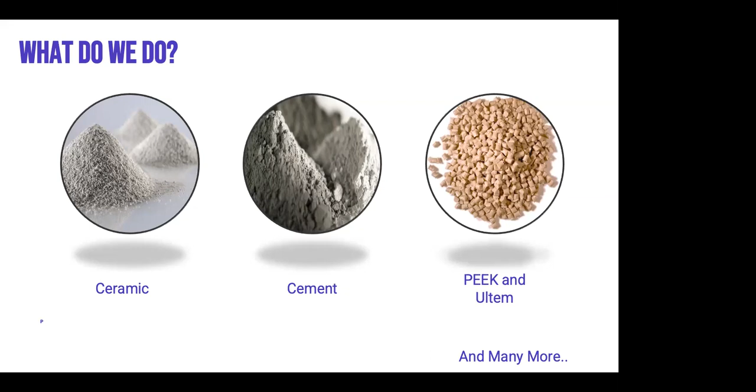In addition to the R&D activities and building of customized 3D printers or 3D printers for specialized applications, we offer 3D printing as a service, 3D modeling and product design, and also we participate with academia for R&D in the field of additive manufacturing.

We have a wide range of 3D printing technologies for our customers to choose from. The range of technology we have helps our customers balance their budget, timelines, and their technical requirements. More on these technologies would be explained in due course of time.

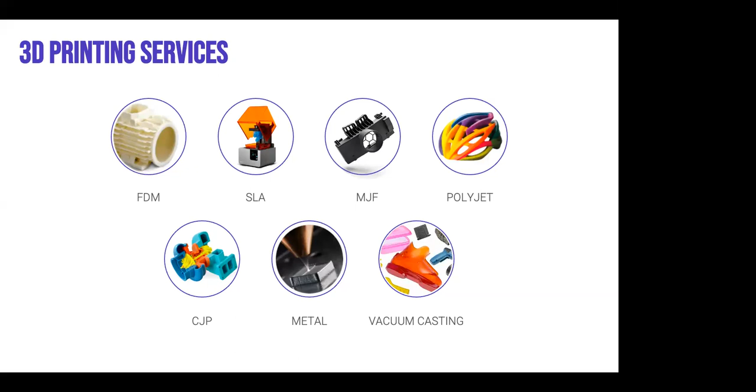It can be noticed that majority of these 3D printing firms in India focus on the service model, but the uncomfortable truth is that only a handful number of startups are focusing towards technology development in India. Though 3D printing has its applications in a myriad of sectors, the manufacturing and medical sectors have been huge beneficiaries of this technology. Though I would like to talk about each of the applications of 3D printing technology in each sector, I'm informed that there are dedicated speakers to talk on those lines.

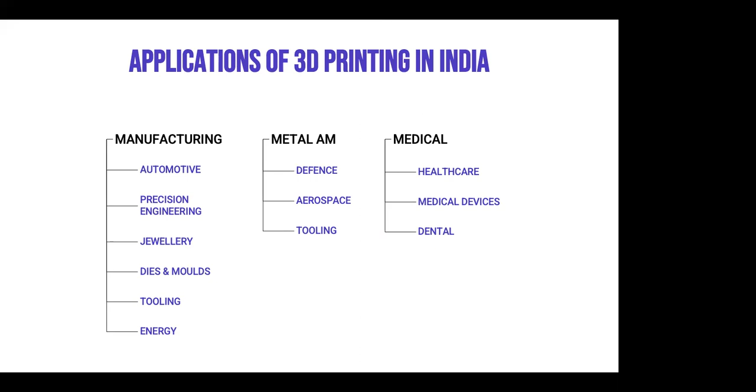A basic split up of additive manufacturing application in India is shown here. It can be noticed that the automotive industry, the transport industry, the tooling and the engineering industry, jewelry and healthcare industries have been one of the early adapters of this technology here in India.

3D printers can be categorized into one of several types of processes. Vat polymerization, wherein a liquid polymer is cured by light. Material extrusion, molten thermoplastic is deposited through a heated nozzle. Powder bed fusion, powder particles are fused by a high energy source. Material jetting, a process in which liquid photosensitive fusing agents are deposited on a powder bed and cured by light. Binder jetting, a process in which droplets of liquid binding agent are deposited on a bed of granulated materials which are later sintered. Direct energy deposition, in which molten metal is simultaneously deposited and fused. Sheet lamination, wherein individual sheets of material are cut into shapes and laminated together. These are the 7 main different types of 3D printing technologies.

Within each of these technologies, it can be noted that there are unique technologies, and for every unique technology there are different brands selling very similar printers. Let's go into these step by step.

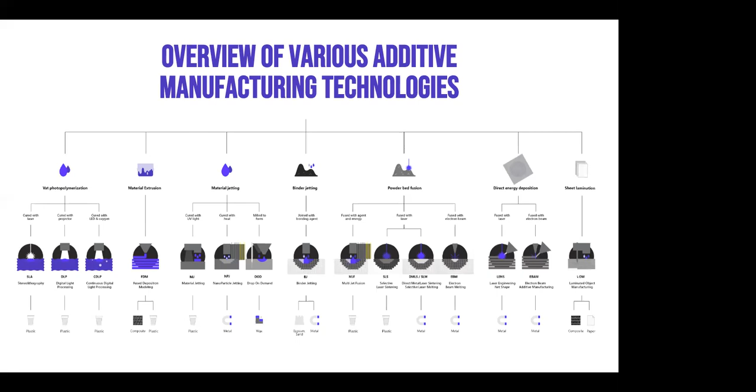Vat polymerization is a category of additive manufacturing process that is used to create 3D objects by selectively curing liquid resin through targeted light activated polymerization. Stereolithography was the first additive manufacturing process to be patented and commercialized. Since the advent of stereolithography in the 1980s, vat polymerization has grown to also include technologies such as continuous liquid interface production and direct light processing under its gambit.

All types of vat polymerization use special resins called photopolymers as the printing material. When exposed to a certain wavelength of light, the liquid photopolymer molecules rapidly bind together and cure into a solid state through a process called photopolymerization.

As shown in the image, in most 3D printers that operate under the principle of vat polymerization, a liquid photopolymer is held in a container or vat with the build platform partially submerged near the surface of the liquid. Using the information supplied by the CAD file, the printer directs a light source to selectively cure the liquid photopolymer into a solid layer. Then the build platform is resubmerged into the remaining resin, and the process is repeated for the next layers until the design is fully printed.

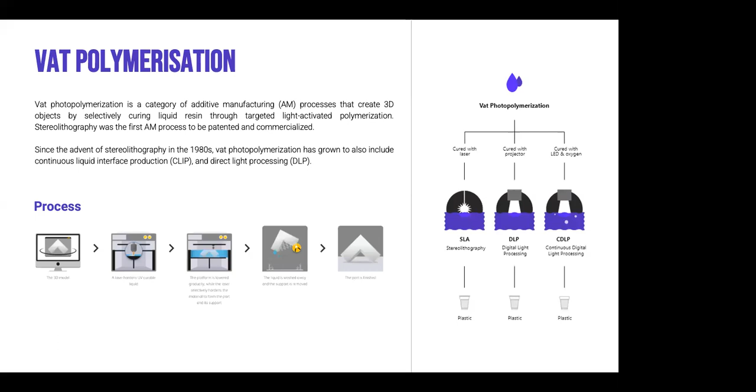Stereolithography and digital light processing in 3D printing are the two most commonly used resin processes. In stereolithography, an object is created by selectively curing a polymer resin layer by layer using an ultraviolet laser beam. DLP is a similar process to SLA, but it uses a digital light projector screen to flash a single image of each layer all at once.

Because the projector is a digital screen, the image of each layer is composed of square pixels, resulting in a layer formed of small rectangular bricks called voxels. DLP can achieve faster prints for some parts as the entire layer is exposed at once, rather than drawing it out with a laser as in the case of the SLA process.

It is also interesting to note on the right side of my screen that there are two types of SLA machine setups, the top-down orientation and the bottom-up orientation. The top-down SLA printers place the laser source above the tank and the part is built facing upwards. The build platform begins at the very top of the resin vat and moves downwards after every layer.

In the bottom-up approach, the SLA printers place the light source under the resin tank and the part is built facing upside down. The resin tank has a transparent bottom and a silicone coating that allows the light of the laser to pass through but stops the cured resin from sticking onto it. After every layer, the cured resin is detached from the bottom of the tank as the build platform moves upwards.

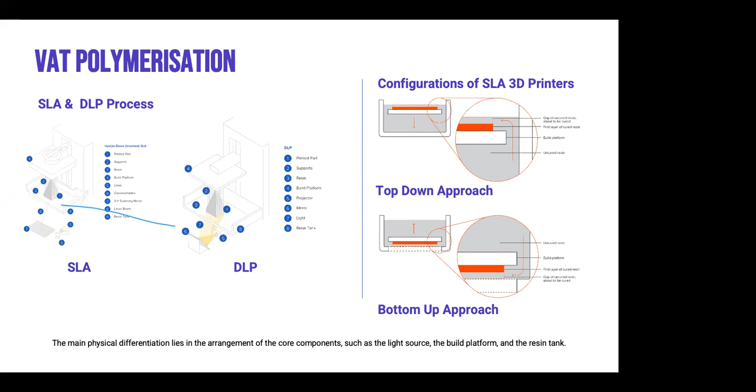Coming to the characteristics of vat polymerization printed parts, in SLA printed parts, there is no difference between the z-axis and the xy plane in terms of chemical bonds. Each continuous part printed on an SLA machine is a continuous polymer network. Since the SLA lines are fully bonded to their neighbors, there are no voids or microscopic cracks. As a result, isotropy and water tightness are achieved.

SLA parts and DLP parts can produce parts with very high dimensional accuracies and very intricate details. SLA parts have a very smooth surface finish, making them ideal for visual prototypes. In SLA, we have a wide range of materials available: rigid materials similar to injection molding ABS, tough and durable materials like polypropylene, clear transparent materials like polycarbonate parts, castable resins, high temperature resins, and specialty resins specifically used for the dental and jewelry sectors.

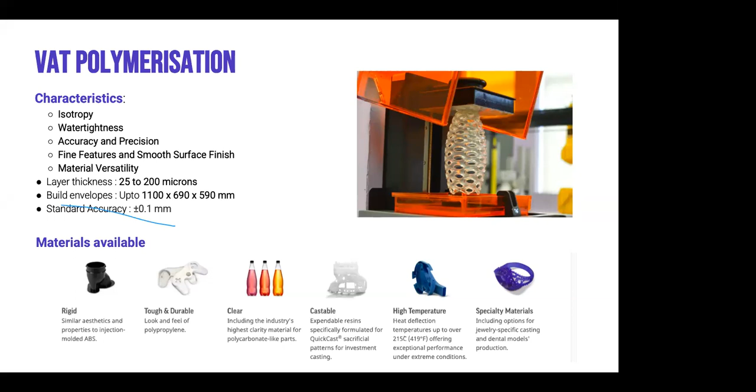So, to sum up, SLA printed parts or DLP printed parts are basically used as design verification models for appearance and proof of concept models. These are functional prototypes and models for form and fit testing. These can also be used for wind tunnel testing models. The high clarity, because of the resins that possess transparency, can also be made into parts for visualization with transparent assemblies and complex assemblies.

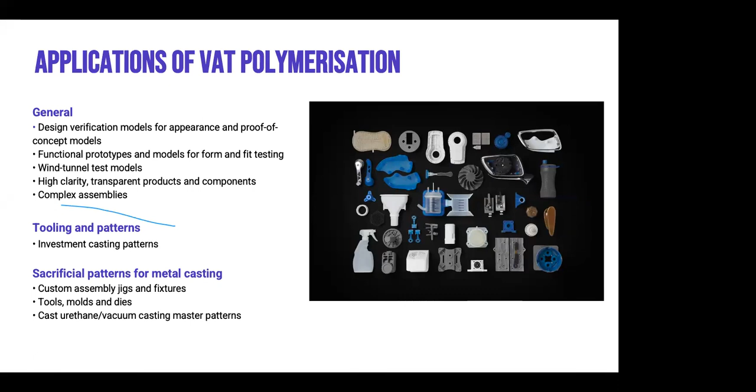One significant application of these SLA printed parts is in the use of vacuum casting, wherein the master is made using 3D printing. Vacuum casting is a technology recommended for production of 10 to 100 parts for mechanical and visual tests. It is a process in which resin is poured into a silicone mold.

The working principle in vacuum casting is similar to injection molding. Both ways produce parts by the mold. However, vacuum casting differs significantly from injection molding in the specific process. The vacuum casting process can be outlined as follows.

Firstly, upon confirmation of the CAD file, the technician starts to make a 3D master model through 3D printing. The master model will be placed into a casting frame and filled with liquid silicon. The silicon mold will be cut into two parts after it is well cured. As per the design request, the technician will measure the proper proportions of the polyurethanes, and then the polyurethanes will be poured into the silicon mold and cured in the vacuum casting machine.

The vacuum casting machine, due to the vacuum condition, is able to remove any trapped bubbles that ensure smooth finishing.

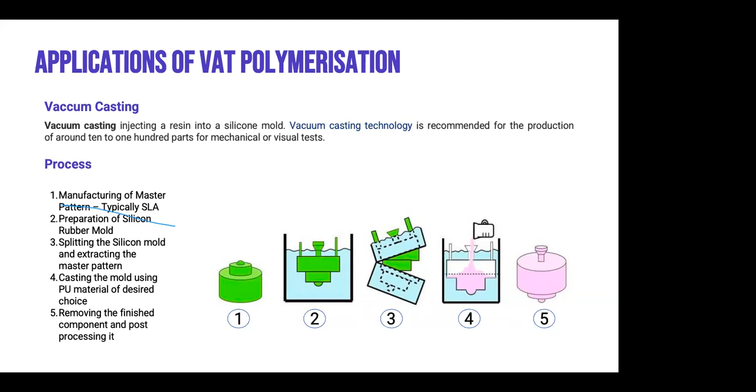Some of the advantages of vacuum casting are high precision and high fine details. Due to the silicon mold, it makes it very much possible to obtain parts that are faithfully true to the original model. Even with complex geometries, the result is perfect and the quality is comparable to the final part. Additionally, the use of PU resin allows you to choose from a wide range of materials as close to your requirement, with a variety of choices in terms of flexibility and rigidity.

It can also give you an option in which the parts can be pigmented with color, or you can achieve a transparency or translucency finish as per your requirement. It is also possible to create overmoldings and produce parts with painted finishes.

One more significant advantage of using vacuum casting is the pricing and the deadlines. The use of silicon mold allows a reduction of cost compared to an aluminum or steel mold. In addition, you can achieve economies of scale from around 10 parts, which makes this method more valuable than 3D printing. Finally, it takes 7 to 10 days to get 30 to 50 functional prototypes, making it a most attractive method to meet urgent requirements.

However, there are certain limitations for vacuum casting. The lifetime of the mold is very short.

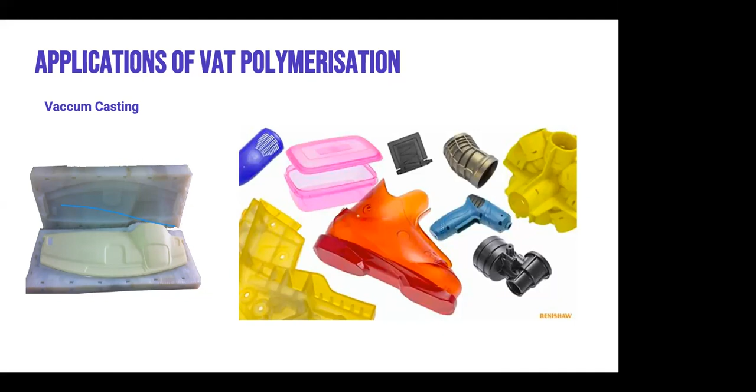Another sector where vat polymerization has been deeply impactful is the jewelry sector. 3D printed jewelry production augments the principles of investment casting, or lost wax casting, with the advantages of digital design and manufacturing process. With lost wax casting, jewelry designers had to hand carve the original pattern in wax, place the wax pattern in a mold to be burnt out, and then pour the precious metal like gold or silver into a mold cavity to create a cast piece.

To achieve its final appearance, designers had to polish and finish the cast piece to shine. With a digital workflow, jewelers use 3D printing software and tools to create designs digitally, and using high resolution 3D printers, produce the 3D printed patterns that can be cast in a mold. After a burnout of a positive pattern, the process follows the same as investment casting pattern, and the process is shown on the screen.

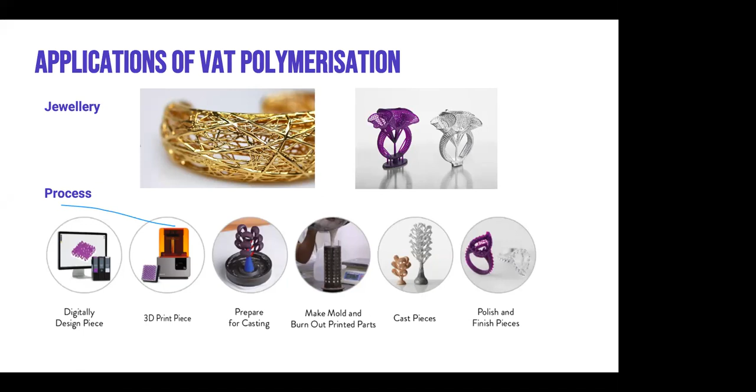Going forward to the material extrusion process, extrusion-based technology is the most popular one in the market. While there are other types of technologies for creating extrusions, heat is normally used to melt bulk of the material in a small portable chamber, and the material is pushed through the feed system, which is used to create pressure to extrude.

Here is how an FDM printer works. A spool of thermoplastic filament is first loaded onto the printer. Once the nozzle has reached its desired temperature, the filament is fed onto the extrusion head and into the nozzle where it melts. The extrusion head is attached to a 3-axis system that allows it to move in the X, Y, and Z directions.

The melted material is extruded in thin strands and deposited layer by layer in predetermined locations where it cools and solidifies. Sometimes the cooling can be accelerated through cooling fans. To fill in an area, multiple passes are required. When the layer is finished, the build platform moves upward or downward, or the extrusion head moves upward depending on the configuration of the printer, and a new layer is deposited. This process is repeated until the part is complete.

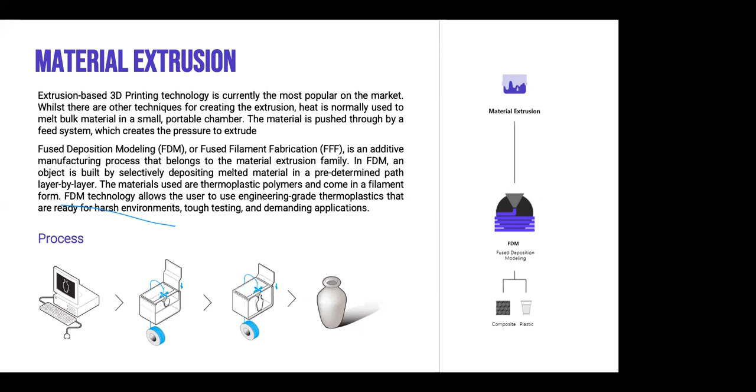So why do we have to prefer the FDM process? FDM is an inexpensive process and works well with a wide variety of plastics. One of the greatest advantages of this FDM material process is the durability of the materials and the stability of the material properties over a period of time. The production grade thermoplastics used in FDM are suitable for detailed functional prototypes, durable manufacturing tools, and also low volume manufacturing parts.

However, parts fabricated using the FDM process are anisotropic, the layer lines are visible, and they're comparatively low in terms of dimensional accuracy and resolution. The minimum layer thickness in this case starts from 0.2 mm. There are FDM 3D printers available with a print volume of 300 by 300 mm up to as large as 1 meter by 1 meter by 1 meter in the XYZ axis. So standard accuracy is 0.2 mm.

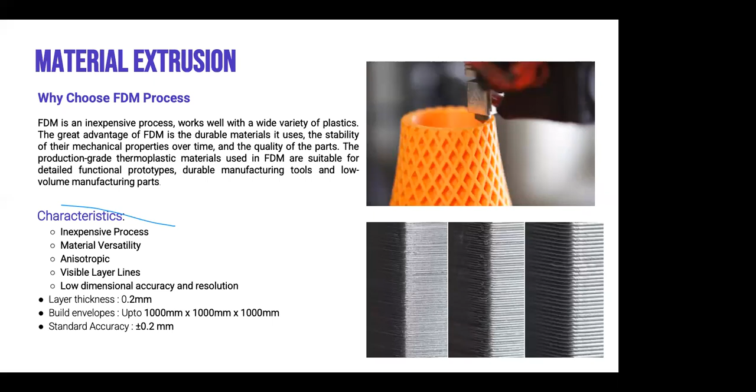There are quite a number of materials that can be used with FDM processes. I would categorize them basically as basic thermoplastics such as PLA, ABS, and PETG. These plastics do not have excellent qualities, but are the most popular printing thermoplastics available. PLA is the most common printing plastic that prints well and possesses decent mechanical properties. However, its complete lack of heat resistance and low durability makes it impossible to use in industrial environments. ABS has superior heat resistance, but isn't particularly strong and reacts poorly with manufacturing chemicals.

PETG is a 3D printing material, a substrate of polyethylene, and is a cross between the two. It is a bit stronger than ABS and a bit more heat resistant than PLA, but is still not robust enough to withstand most manufacturing equipment. The niche materials include TPU, polycarbonate, and nylon. Niche thermoplastics have one or two excellent facets, making them very useful in specific applications.

Nylon is a perfect material. It's not stiff or particularly strong, and it carries virtually no heat resistance, but it's extremely durable and has remarkable chemical resistance. As a result, it's used in applications where flexibility and durability are very important. TPU is an extremely ductile material that has properties similar to nylon, but with a bit more flexibility. Polycarbonate is an excellent plastic in many aspects, quite strong and heat resistant, but only moderately durable and chemically resistant.

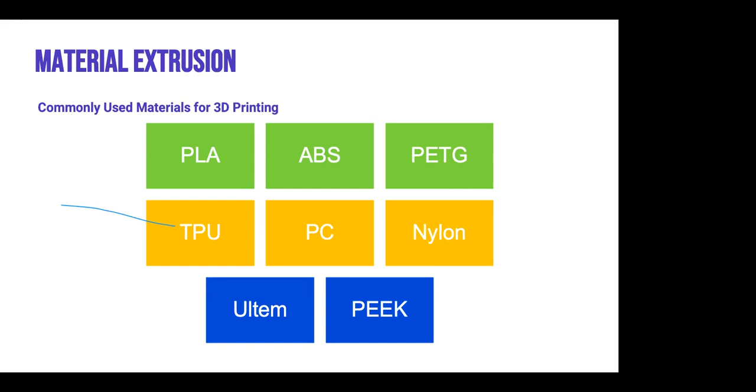Composite 3D printing is a young technology, but one with huge, largely untapped potential.

So what makes a composite? A composite is a combination of two or more materials with dissimilar properties, provided these properties work together to make a single advanced material. When we speak about continuous fiber 3D printing, a composite means that a particular fiber is impregnated and covered with plastics. Typically these are a base polymer referred to as matrix, and reinforcing fibers of any type, bound together to produce particular sets of desirable characteristics. In the context of 3D printing, fiber composites can be of two forms: chopped carbon fiber composites, and continuous carbon fibers.

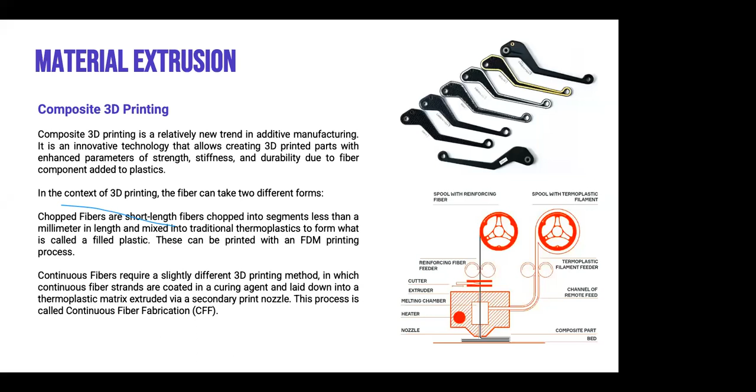Going forward, powder bed fusion processes. Powder bed 3D printing technology spawns products with precision and accuracy. This technology enables the manufacturing of a vast array of geometrically complex products using a heat source, mainly lasers or electron beams, to fuse powder particles layer by layer, forming a solid part. Manufacturers can benefit from this technology due to the freedom of design consideration it provides, enabling the designer to use creativity in achieving desired components.

The powder bed fusion methods can be classified into selective laser sintering (SLS), multi-jet fusion by HP, selective laser melting (SLM), and electron beam melting.

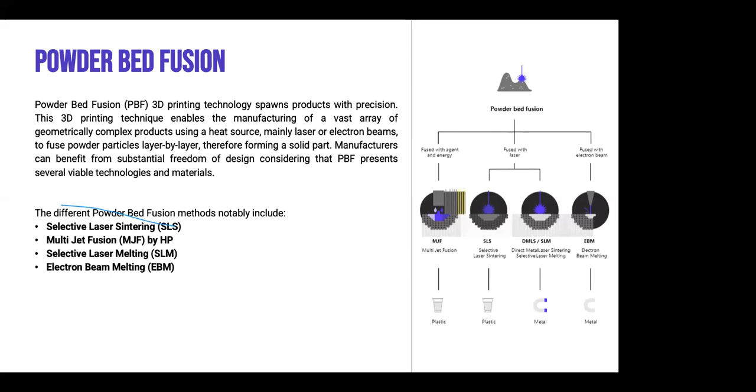Let me first talk about the SLS process. SLS produces solid parts by using a laser to sinter thin layers of powdered raw material, one layer at a time. The process begins by spreading an initial layer of powder over the build platform. The cross section of the part is scanned and sintered by the laser, solidifying it. The build platform then drops down one layer and a new layer of powder is applied. The process repeats until a solid part is formed. The result is a component completely encased in unsintered powder. The part is removed from the powder, cleaned, and then ready for further post-processing.

Multi-jet fusion is a powder-based technology that does not use lasers. The powder is heated uniformly at the outset. A fusing agent is jetted where the particles need to be selectively molten, and a detailing agent is jetted around the contours to improve part resolution. While heat lamps pass over the surface of the powder, the jetted material captures the heat and helps distribute it evenly, forming a solidified layer.

Multi-jet fusion uses fine-grained materials that allow ultra-thin layers of 80 microns thickness, leading to parts with high density and low porosity compared to parts produced with laser sintering. It also leads to exceptional smooth surface finish straight out of the 3D printer, and functional parts need very minimal post-processing from this technology.

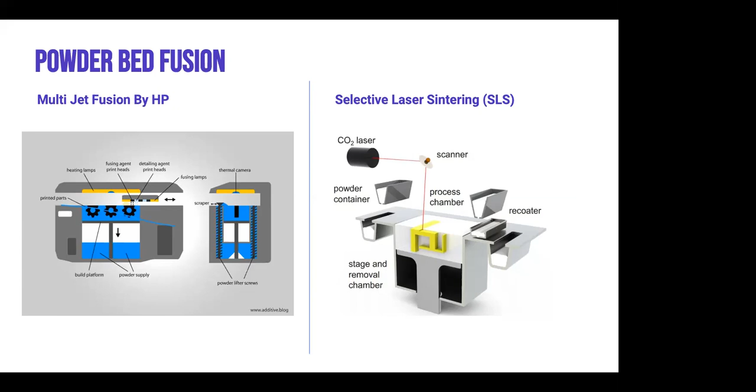However, there are certain common traits which both these printers possess. Freeform design: since these are powder-based processes, the previous layer of unsintered powder acts as support for the next layer. Both these printers can offer functioning with a versatile amount of material. These are scalable, fast, and cheap.

Both SLS and multi-jet fusion find application in a wide array of sectors such as aerospace, automotive, product design, consumer electronics, defense, and research and development.

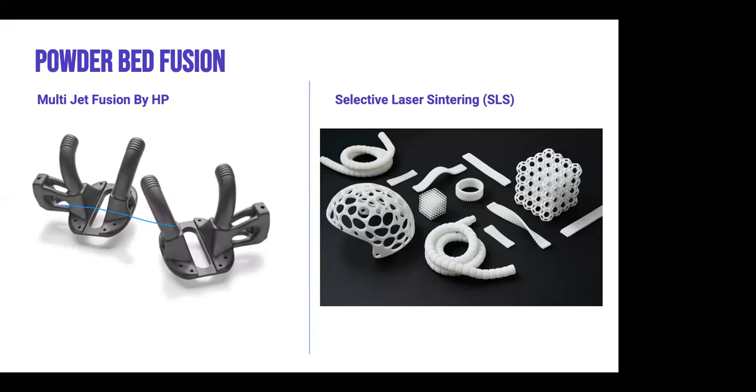SLM and DMLS, both selective laser melting and direct metal laser sintering, produce parts via methods similar to SLS. The main difference is that SLM and DMLS are used in the production of metal parts. SLM achieves a full melt of the powder, while DMLS heats the powder to a near melting temperature until they are chemically fused together. DMLS works with alloys, while SLM can use single component metals such as titanium.

Unlike the SLS process, SLM and DMLS require support structures to compensate for the high residual thermal stresses generated during the printing process. Electron beam melting.

Electron beam melting uses a high energy beam rather than a laser to induce fusion between the layers of a metal powder. A focused electron beam scans a thin layer of powder, causing localized melting and solidification over a specific cross-sectional area.

Electron beam systems produce less residual stresses in parts, resulting in less distortion, and they require less anchors and support structures. Moreover, electron beam melting uses less energy and can produce layers at a faster rate than SLM and DMLS, but the minimum feature size, powder particle size, and layer thicknesses are typically of lower quality.

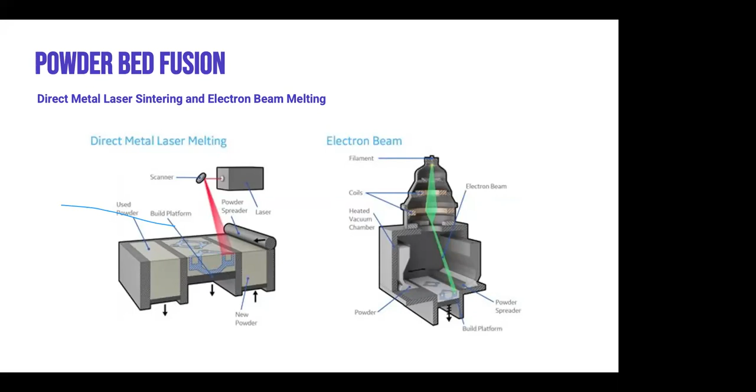The next process that we come across is the material jetting process. Material jetting technologies use UV light or heat to harden photopolymers, metals, or wax, building parts one layer at a time. Nanoparticle jetting and drop on demand are two other types of material jetting processes that have been recently established.

Often, while working in the field of additive, as an industry person, there are times wherein we feel one material or one color is just not enough. And that is exactly where polyjet technology by Stratasys comes into picture.

Polyjet technology is one main manufacturing technology under the gamut of material jetting that dispenses a photopolymer from hundreds of tiny nozzles in the printhead to build a part layer by layer.

This allows material jetting operations to deposit build material in rapid line-wise fashion compared to other point-wise deposition technologies that follow a path to complete the cross-sectional area of a layer. As droplets are deposited to the build platform, they are cured and solidified using UV light. Polyjet processes require support, often printed simultaneously during the build from a dissolvable material that is easily removed during post-processing. Polyjet material enables horizontal layers of just 16 micron thickness, fine details, and ultra thin walls up to 0.6mm depending on the geometry of the part.

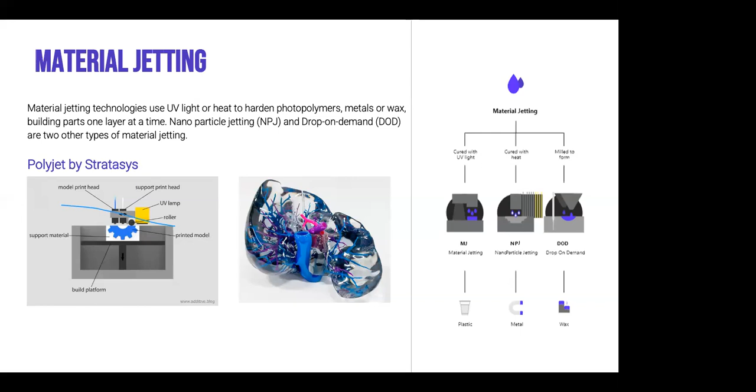Ceramic 3D printing is a way to create breakthrough designs and improvements for both technical and business aspects of unique ceramic materials. The additive manufacturing of ceramics has the potential to not only transform the way the ceramic industry addresses prototype development, but also presents an opportunity to open up new applications that until now were impossible to produce using conventional ceramic technology.

In this process, a resin that is filled with ceramic particles is used in an SLA or DLP printer that cures each layer with UV light, and the final parts must go through a debinding process. Let me explain it in a little more detail. The printer builds a 3D model from the bottom to top approach, one layer at a time.

First, the printer's rolling mechanism rolls a thin layer of ceramic powder and resin onto the print head. A UV light is incident on the build platform, and it selectively cures the material. The platform then drops and the roller further spreads, and this process is repeated again and again, very similar to the SLA or DLP process.

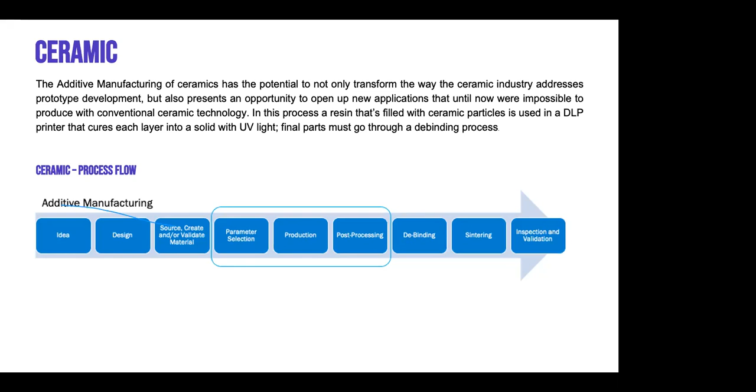Ceramic materials are typically used because of their hardness, abrasion, and heat resistance; their high mechanical and dimensional stability; their high mechanical strength at high temperatures; their high corrosion resistance and oxidation resistance; and their electrical and thermal insulation.

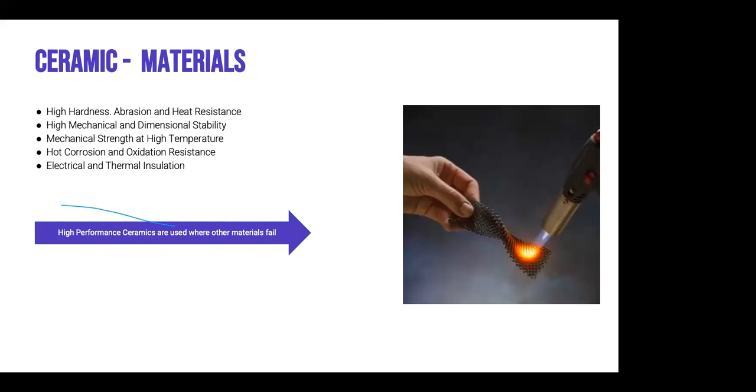Typically, high performance ceramics are used where other materials fail. Ceramics also find huge application in the medical engineering sector. These are bioinert and bioresorbable. They are non-allergic, have low thermal and no electrical conductivity, are easy to sterilize, and have high mechanical strength and wear and tear resistance.

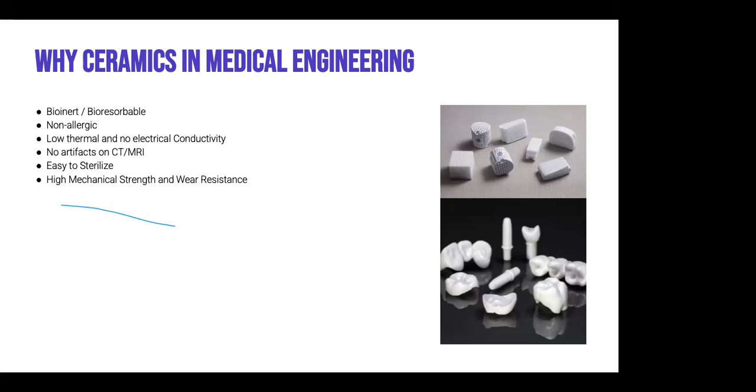Quite a number of ceramic materials have been chosen and experimentation is underway with respect to ceramic 3D printing. Most commonly in the healthcare sector, people are using tricalcium phosphate and hydroxyapatite, and in the engineering sector, people are using zirconia, toughened alumina, silica-based, silicon nitrides, etc.

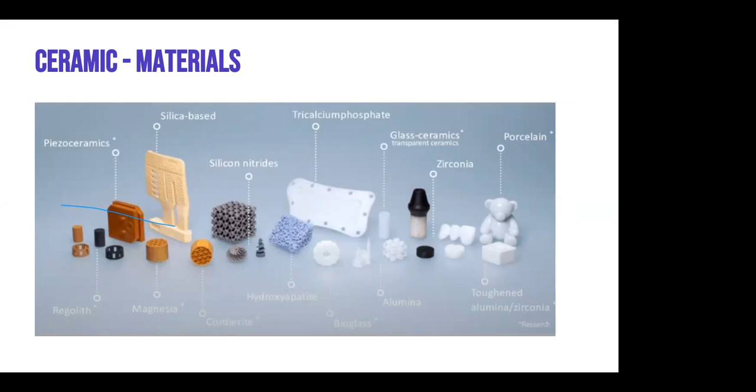Ceramic 3D printing finds a lot of applications in the aerospace sector, wherein design freedom for complex branching structures and multiple walls can be easily achieved. It reduces lead times required for faster processing of requests. Ceramic 3D printers typically save a lot of cost for small series production, and they have complete reproducibility and dimensional accuracy.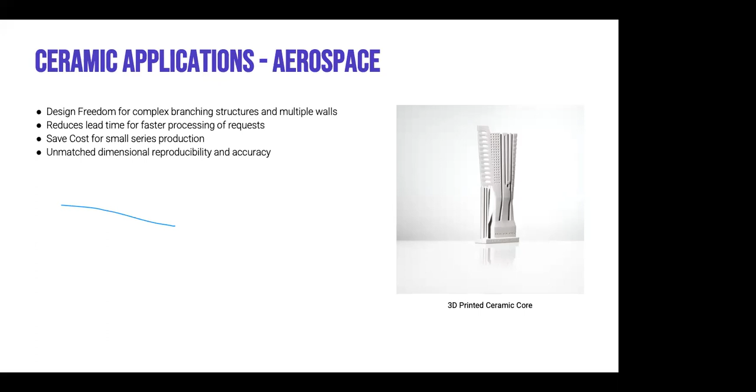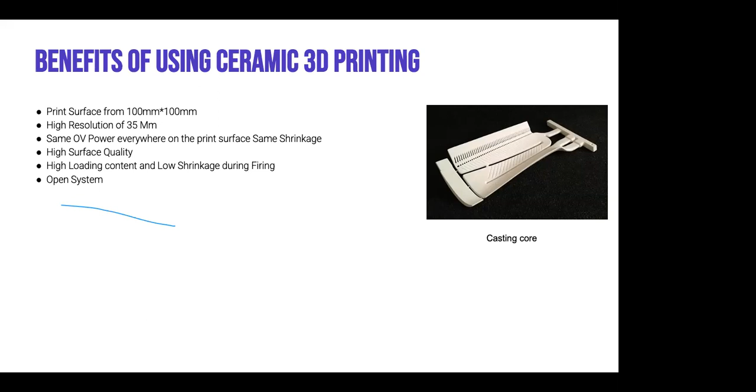We've come across a wide range of 3D printing technology, but what is causing challenges to adopt these technologies in India? High cost of capital equipment, lack of formal additive manufacturing standards, lack of additive manufacturing ecosystem, lack of skilled manpower, monopoly of the additive manufacturing market by foreign OEMs, and lack of clarity around the issue of liability.

For example, nobody knows whom to fight against in case of damage. Should we go to the manufacturer, the person who supplied components to the manufacturer, or the OEM? Most of the monopoly goes unaddressed. Most original equipment manufacturers are foreign companies. This has created a monopolistic approach towards consumables, which are very expensive, thus hampering the adoption of AM technology here in India.

Speaking about the lack of additive manufacturing ecosystem, service providers in India are limited, and most are not equipped with competitive technologies capable of handling materials such as plastic, ceramic, and metals. The AM ecosystem needs to develop by aggregating all service platforms under a single platform to provide comprehensive additive manufacturing solutions.

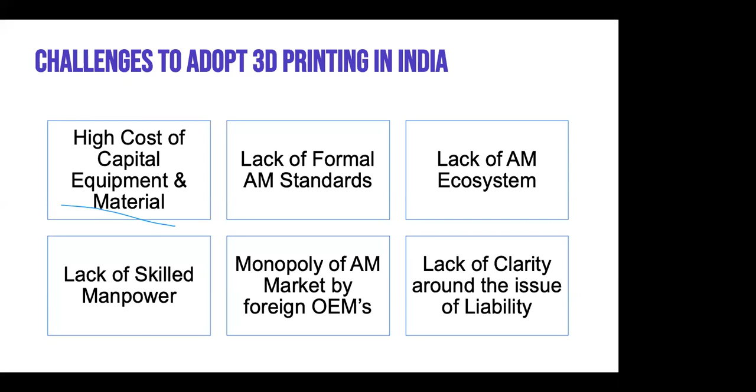So what would enable additive manufacturing technology to go ahead in the coming days? It is innovation in the areas of design, material, processes, and value chain. Only if innovations come across these sectors will the technology move ahead.

So is there any role for startups here in India? I would say yes. Typically, startups in India primarily focus on technology development, and these startups are not started by very experienced personnel. They are started by people right out of their engineering, or sometimes even while they're still in engineering.

One such example is Tvasta, an IIT Madras startup founded by Mr. Adithya. They primarily focus on construction 3D printing. The founders of Tvasta were mentored by faculty at IIT Madras, and together they developed this technology of construction 3D printing and showcased it to everyone and to the world. Recently, the Vice President of India visited their facility.

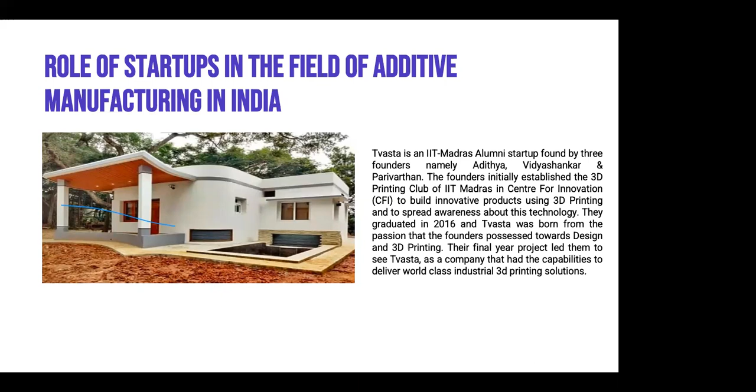Going ahead, there's another startup based out of Chennai, another IIT Madras startup by the name Fabheads, which focuses primarily on composite parts for the manufacturing sector. They use 3D printing and have developed their own 3D printers for printing continuous carbon fibers and other composite materials.

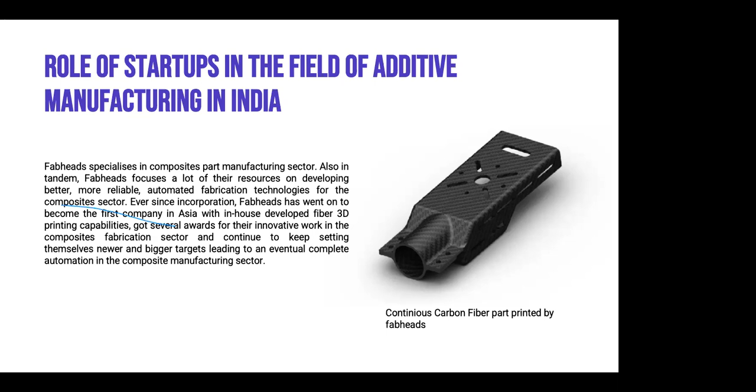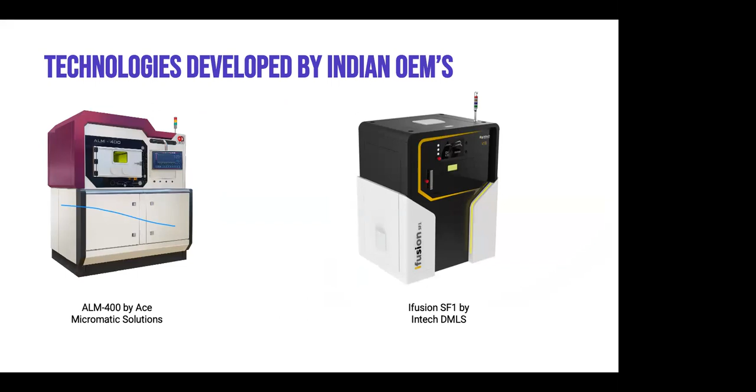However, it is worthwhile to note that recently a couple of big industrial OEMs have come into the picture of manufacturing 3D printers here in India. On the left, Ace Micromatic Solutions have launched their ALM 400 large format metal 3D printer here in India, and Intech DMLS, based out of Pune, has also launched its 3D printer in India.

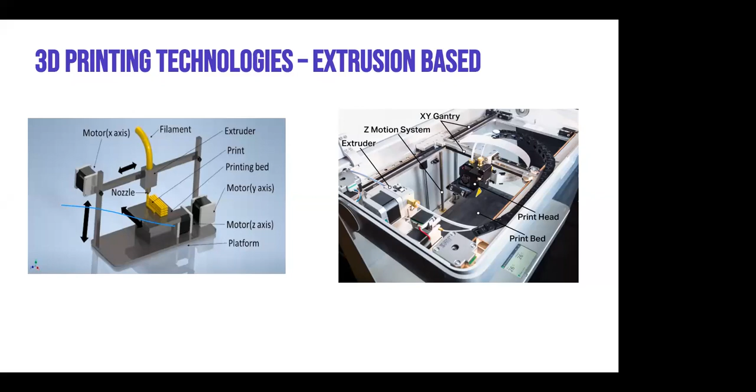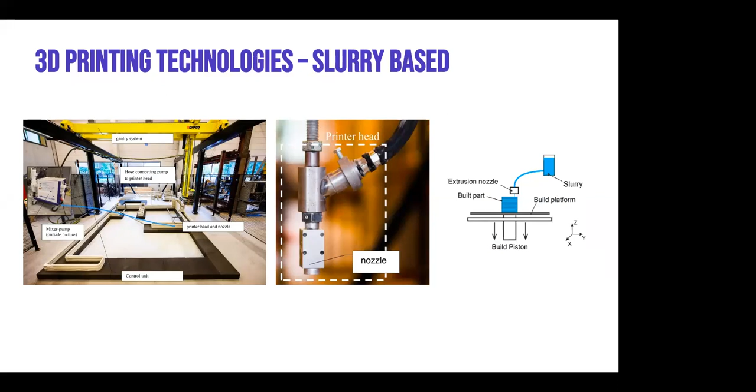Going forward, once we develop mastery over building the XYZ and controlled extrusion of materials, we can also go to the extent of 3D printing drugs, which showcase and give you possibilities to develop patient-specific drugs, wherein anything can be designed using a software.

One of the benefits is that a person who is in requirement of a drug can consume the active pharmaceutical ingredient as per his desired requirement. He does not have to eat much or more. For example, we generally have Dolo 500 mgs, so if required, sometimes we break it into half and give it. To avoid all those things, we can directly 3D print a tablet based on the actual dosage required for that particular person.

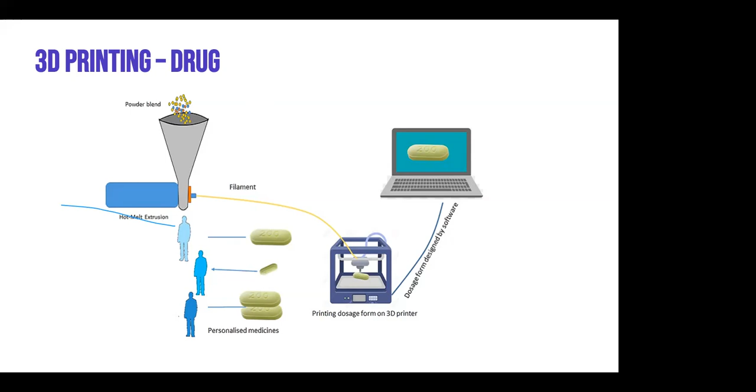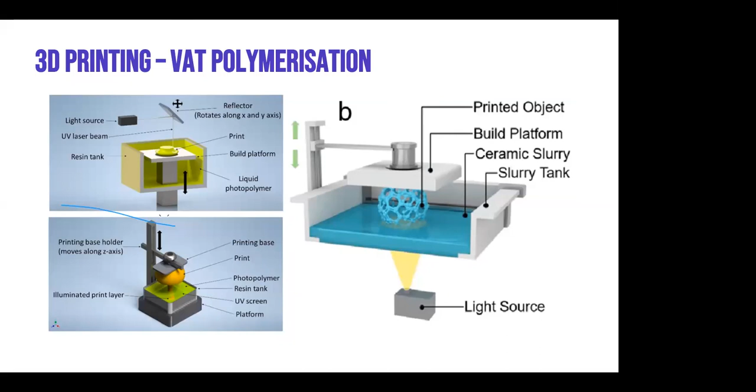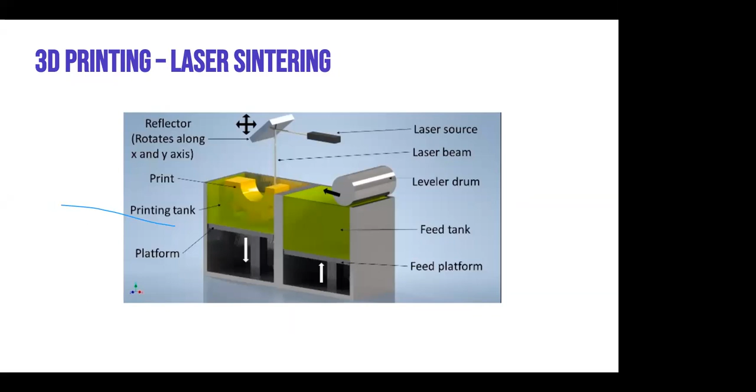So I would like to conclude by saying universities must prepare the students for a technology enabled future. I request the faculty here to kindly allow the students to work with interdisciplinary teams, consisting of mechanical engineers, electronics engineers, electrical engineers, computer science engineers, in order to come up with new kinds of 3D printing processes or any kind of technology developments that would help not just themselves to grow, but also take the country ahead. Thank you.